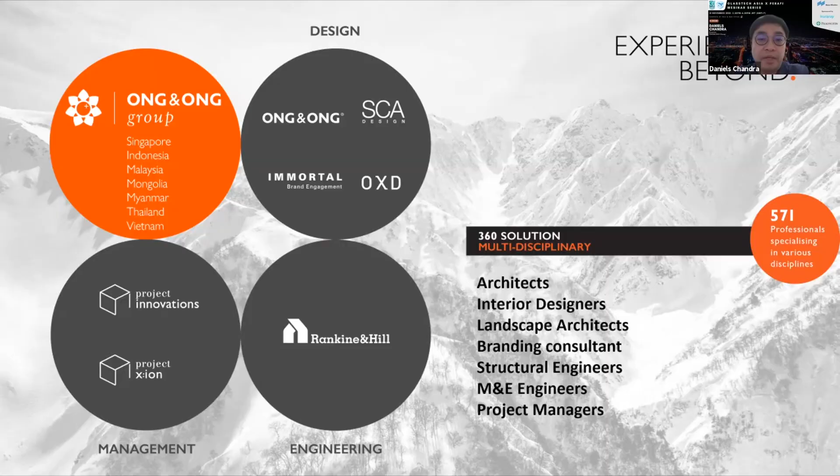I hope most of you are familiar with building information modeling before. In the Singapore context, for example, we started back in 2010 with BIM. The Singapore government basically pushed consultants in particular to embrace BIM in their design, and also for authority submissions and building approvals and so on.

So BIM essentially is basically we model the thing first virtually, and we produce the drawings that come from the model. It's not the other way around, where you create plan, floor sections, elevations, and then get the models after that. You actually start with the model first, and then drawings come later.

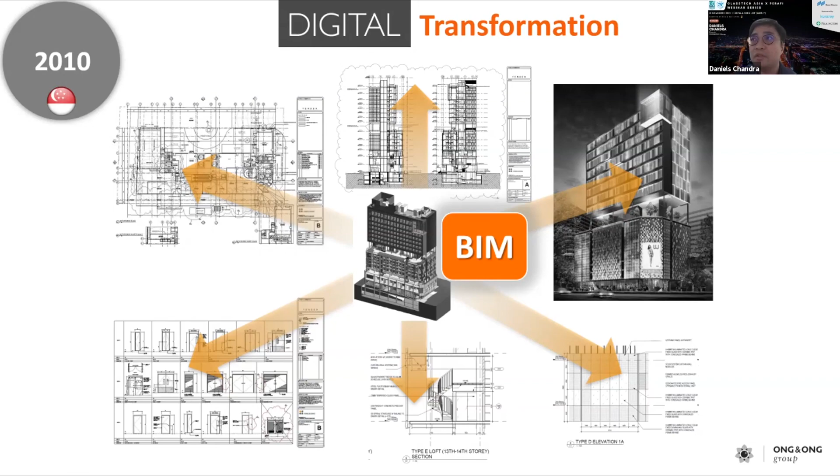The use case of BIM is pretty much across the board from start to finish of the project - starting from design development, conceptual design, including authority submission for the Singapore context, 3D coordinations, and so on, all the way until FM and some automations. This is what we have for BIM.

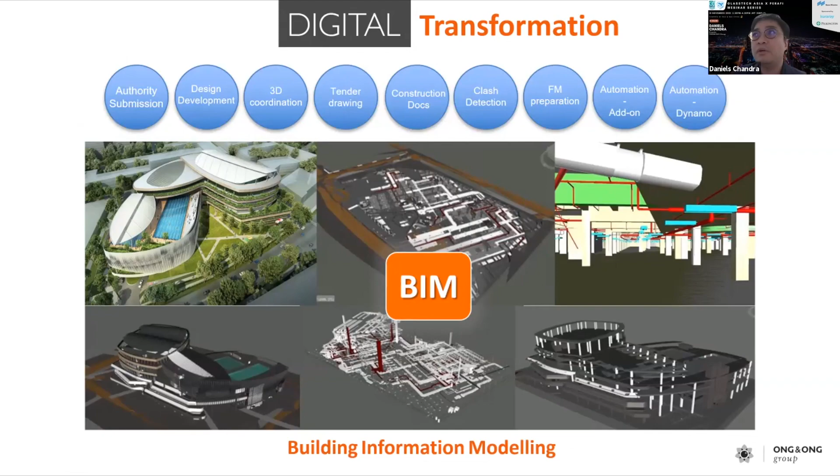Singapore also embraced what we call virtual design and construction, which is VDC. That was back in 2015, which is pretty much another so-called enhanced process after BIM. So we have BIM, we have ICE, which is integrated concurrent engineering, where everybody gets together to do coordination using the BIM model.

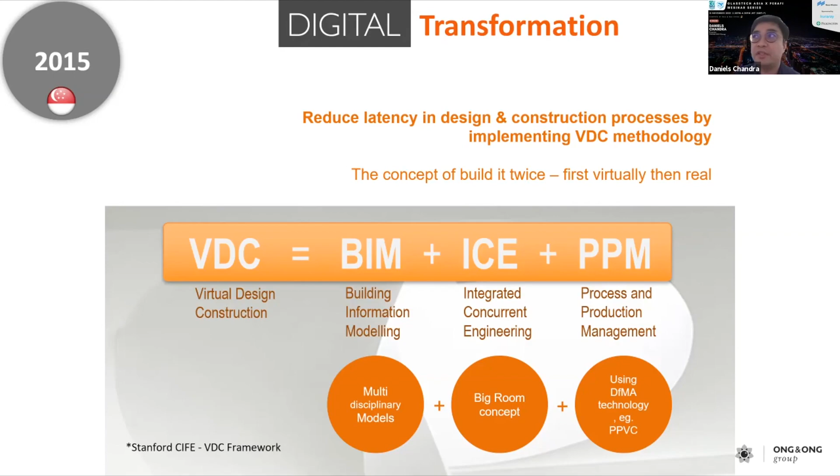And then some processes of production and management, things such as DFMA, for example, design for manufacturing and assembly. All of these are part and parcel to create a virtual mock-up of the actual thing before it's actually built. So what we call is, we build it twice - conceptually we build it in the computer first, then after that you build it on site.

Just to give you an idea, this is one of our projects using the VDC process, where we built the whole entire thing virtually from design all the way to the construction process as well. Meaning, for example, site logistics, how these things are actually constructed, from the building structure, architecture, M&E, as well as the facade.

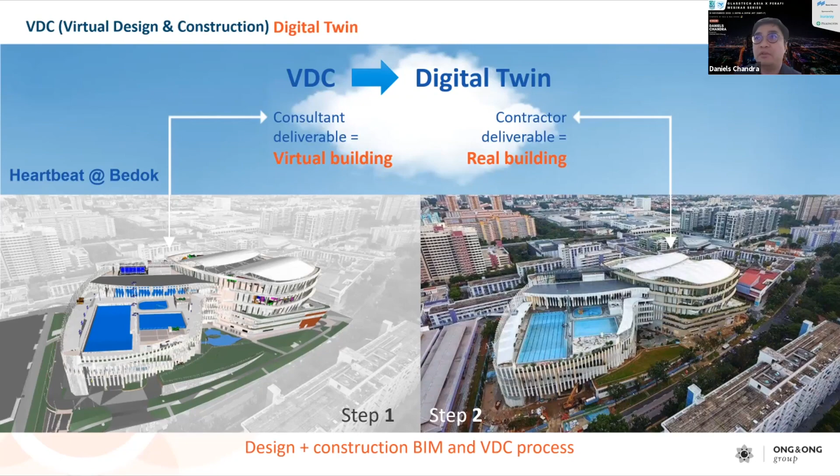So step one is build the thing virtually using BIM technology, and then second is to actually build the thing on site. So make sure everything has no issues, no clashes, no problems, then you actually construct it on site. That's the holistic approach of VDC, which is pretty much the approach of digital twin, where you have the physical and the virtual together.

Now IDD - this is one of the latest approaches of digitalization from the BCA Singapore. The earlier approach started back in 2017. IDD definition is Integrated Digital Delivery. There are 4 pillars in there. The first one is digital design.

Second is digital fabrication, digital constructions, and also digital asset delivery and management, which is pretty much FM, or what we call facility management.

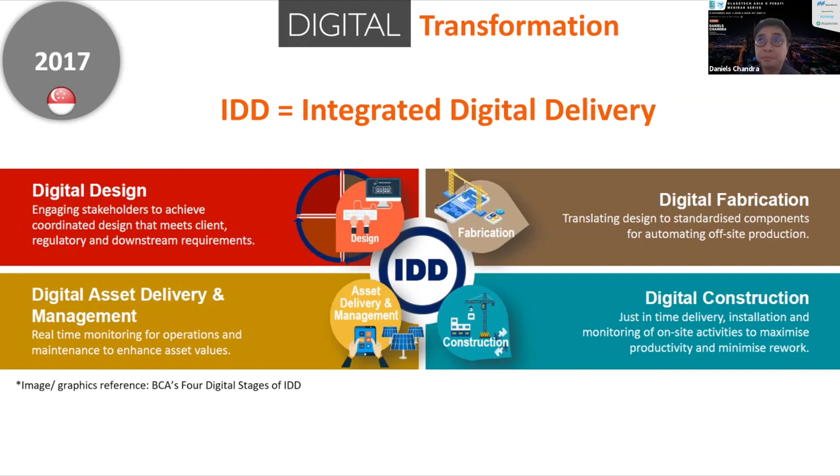For the purpose of today's discussion, IDD is quite a lot of things to discuss if you go through everything. So for today, especially the part that relates to the facade models and processes and workflows to create the facade design, it's pretty much the digital design, which is on the left-hand side here.

It's about how we optimize the design for the facade, how to do some simulations and analysis on the building itself, and how to integrate the whole process together with BIM and VDC. I'm going to touch base also about the cloud, because especially nowadays with the needs of collaboration, how we actually move from traditional method to digital method. Cloud-based is very essential, especially with the implementation of common data environment. So I'm going to share a bit of that, as well as the base infrastructure to set up the whole entire workflow.

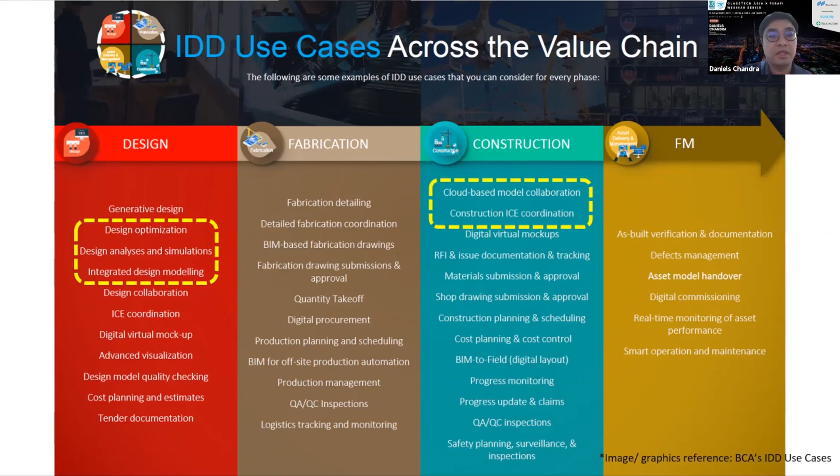In ONG&ONG context, for our digital transformation pillar, we came up with a strategy we call digital beyond. It's basically a three-prong approach: first is the digital workplace, second is digital workforce, and last is the digital workflow. So we set up our digital workplace as a base to enable the other two.

Our staff and manpower need to be trained and need to change their mindset to embrace the holistics of digital transformation. And of course, after that, the workflow itself needs to embrace the whole three-prong approach again, and deliver it in a digital way rather than doing it the manual way.

Okay, so I'm going to start with the digital workplace, the difference between standalone and collaborative. We're moving away from standalone to collaborative. When we started BIM in 2010, 2011, and 2012 back then, it was kind of standalone, in the sense that we were doing our own architecture models, consultants doing their own structure models, and our M&E design partners also doing it on their own.

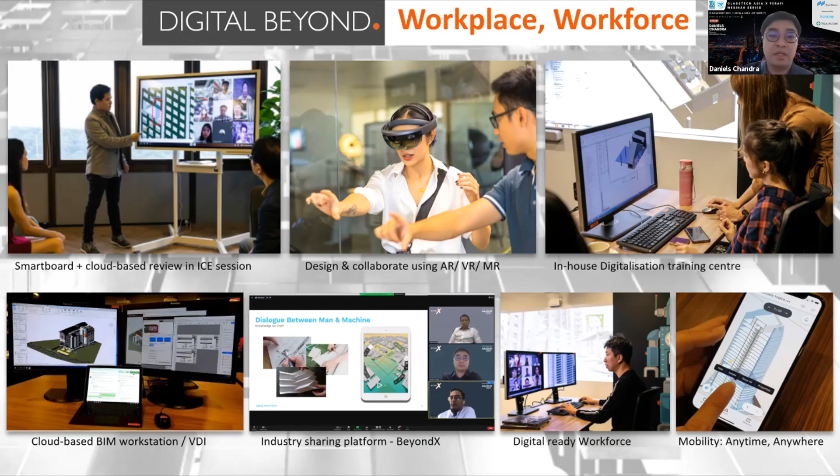Okay, now going back to IDD, which is basically about digital delivery. Digital delivery, when you talk about digital here, is about the data. So why is digital workplace important for IDD? Because we need to make sure the data is entered correctly and then collaboratively and correctly implemented in the system.

So therefore the project can be delivered without any issues and any dramas, pretty much. Right, so we embrace what we call CDE, Common Data Environment Platform, to support the IDD framework.

That is to ensure everyone's actually working from the same data source. It's not like one consultant having their own thing, their own data set, their own floor plans. No, we don't do that. Everyone needs to work in the same digital environment, in the same cloud-based environment, which is the common data environment that we are looking to.

So in ONG&ONG context, this is the setup that we currently use now. We moved away from the server environment because we have 7 offices around the regions, so we move everything to the cloud now. This is what we have now, a common data environment across the offices, and we're also sharing this with our consultant partners, main contractors, and subcontractors as well.

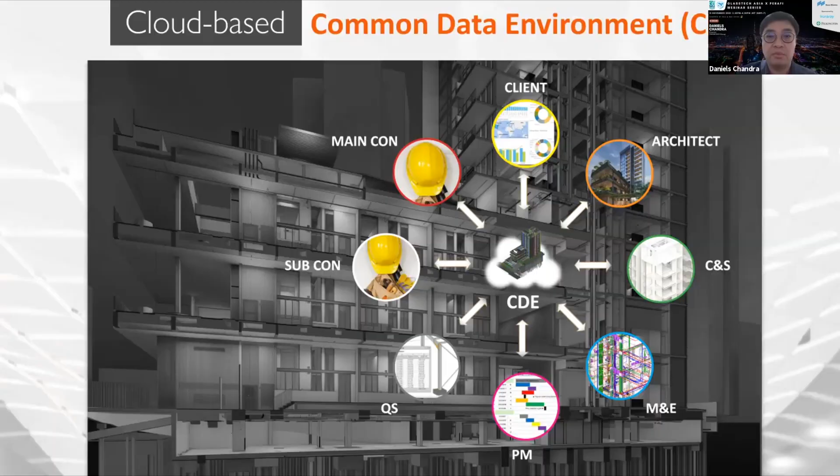So this is an example of projects that we did using the common data environment, and we successfully won an award as well. This is one of the healthcare projects, and another one is a private residential project, which is one of the first IDD projects in Singapore, one of the first 12. So that's one of the examples.

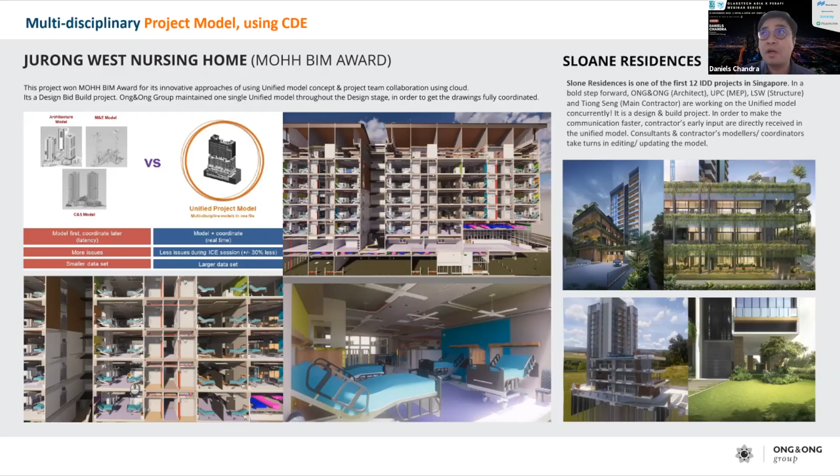Now speaking on the workflow, the reason CDE is actually important is because it's the platform itself. In terms of creating the BIM model and then conducting VDC and integrating it into the IDD workflow, that becomes one of the enablers. So for example, we can enable a multidisciplinary BIM model, where every discipline, every consultant actually works in the same file, same model. Essentially it's one single file. With real-time authoring as well, we need this kind of infrastructure to be enabled first.

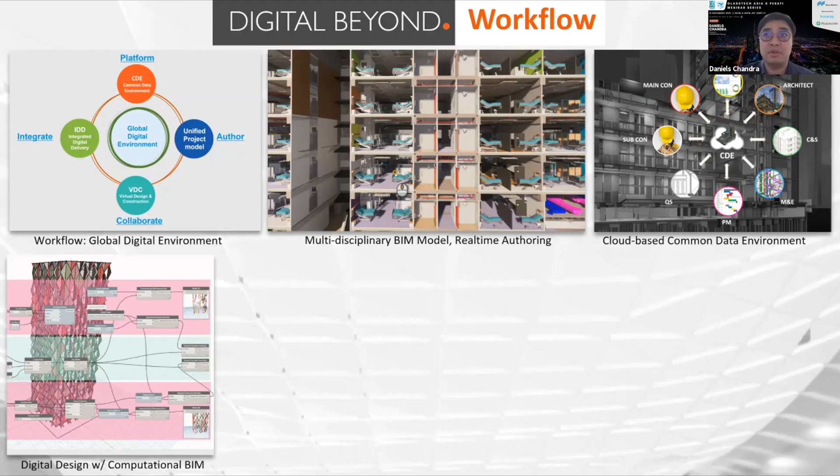Digital design with computational BIM is something I'm going to talk more about after this, which is related to the facade treatments of the building and how to generate some facade options from this tool. This is one of our add-on tools that we developed in-house, BIMomatic, another way to automate the process to ensure that the IDD process of automation is being implemented much better and more efficiently.

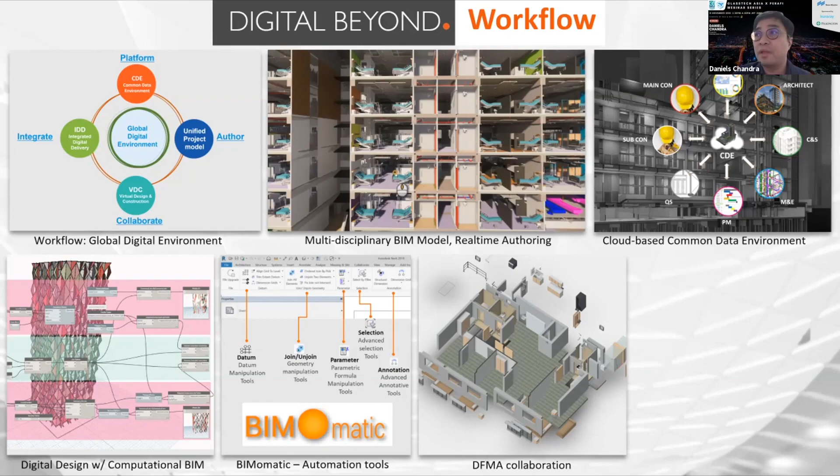DFMA is of course the next level of digital fabrication in IDD, so it's one of the key things we're deploying in the office, as well as for the FM handover. So when the project's finished, we scan the buildings using a LiDAR scanner, then after that hand over the model together with all the sets of the FM data.

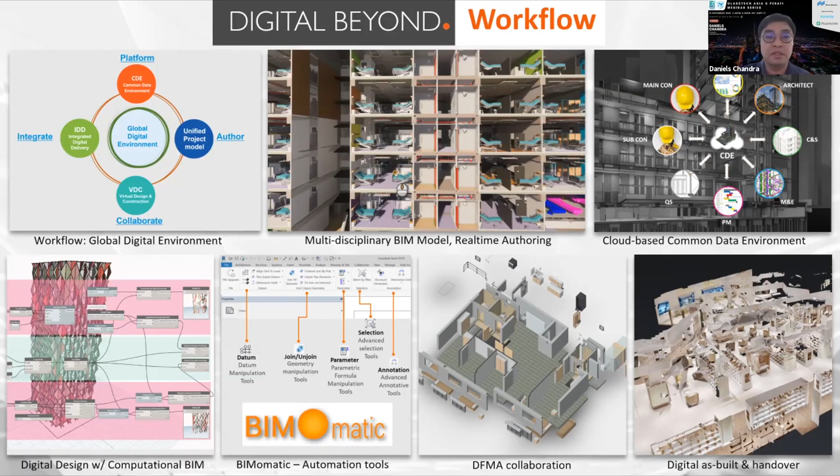Digital design use cases for IDD, I'm going to touch on this. It's pretty much about parametric modeling, computational BIM, and generative design. So just imagine we have this kind of square cube. Parametric modeling, computational BIM, and generative design is one of the methods we normally use to do the facade treatment for the building, which is part of the IDD use case listed in BCA's IDD.

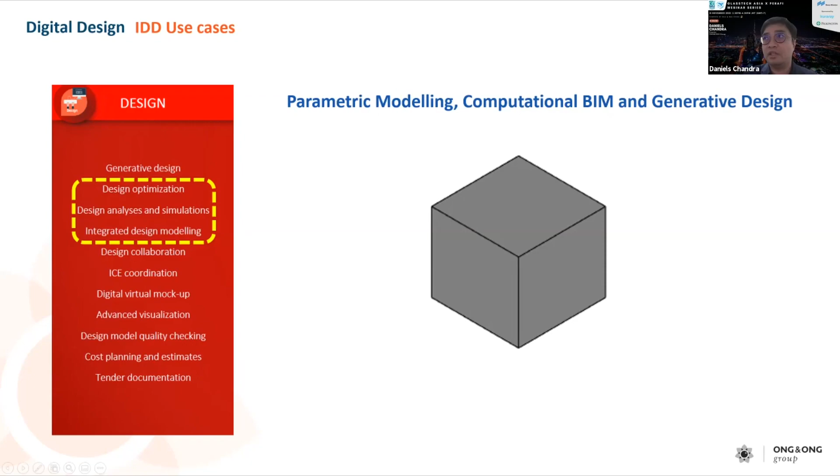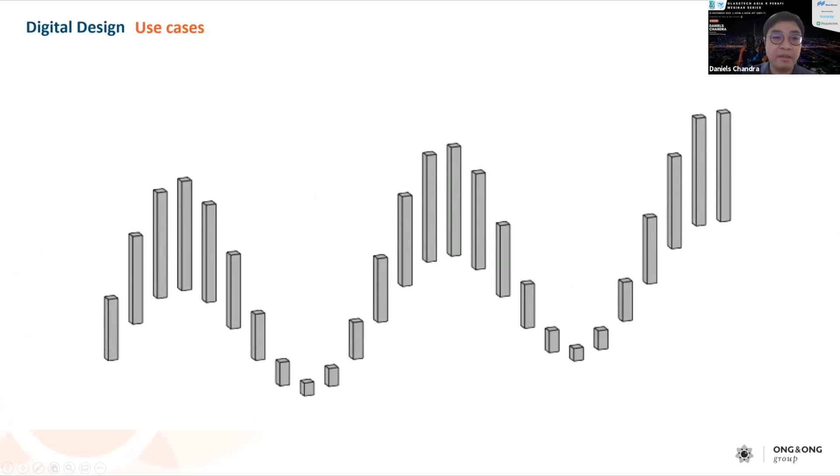Just imagine it's a box like this. What we do is manipulate the box with different heights, different lengths, different configurations of width and height, and then arrange them accordingly with certain patterns. So this is how we actually manipulate the models and do some options for the facade, for the building skin, for example.

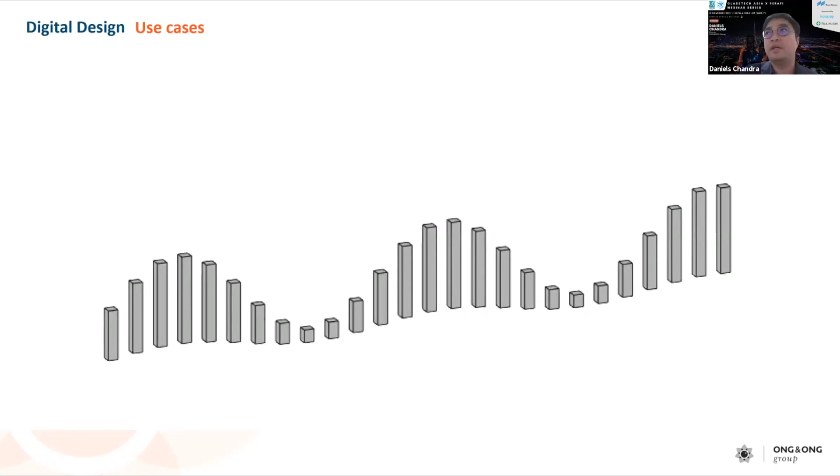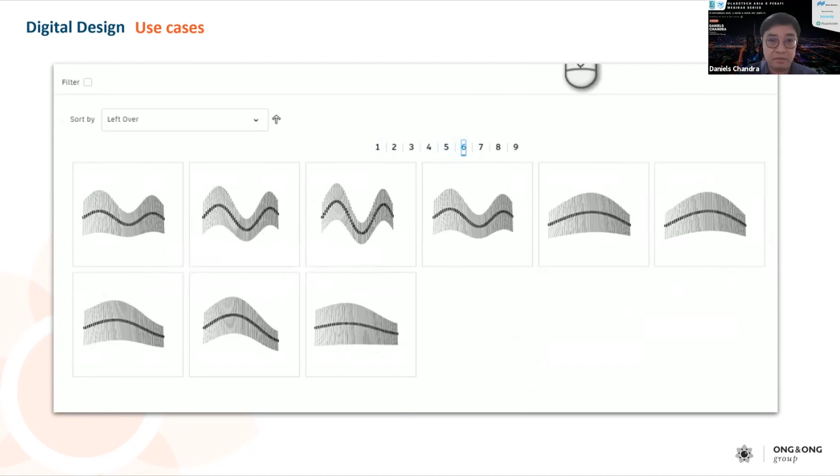Once we manipulate it with a script like this, the computer can also offer us a series of options. These are examples of options being offered, so many pages of options displayed by the computer. As designers or architects, this tool is quite helpful. So essentially, this is the idea of how parametric modeling, generative design, and computational BIM actually work.

Now I'm going to show you some case studies from the projects themselves. This is one example of a master planning project with two towers, I think it's residential. So it's a typical building massing exercise.

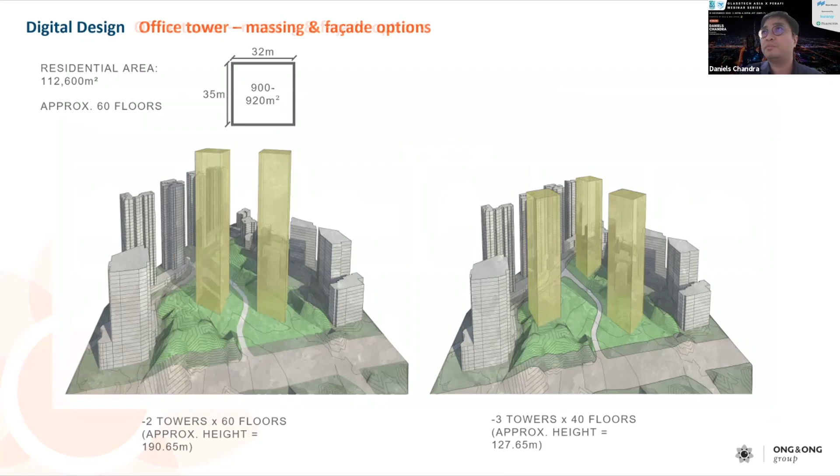So we have typical towers like this, with the setup with the ventilation gap, and also some balconies and terraces and so on. And this is one of the samples of the floor plans. So the floor plan layout 1 and layout 2, there are 2 different things, with the balconies, fenestrations and stuff.

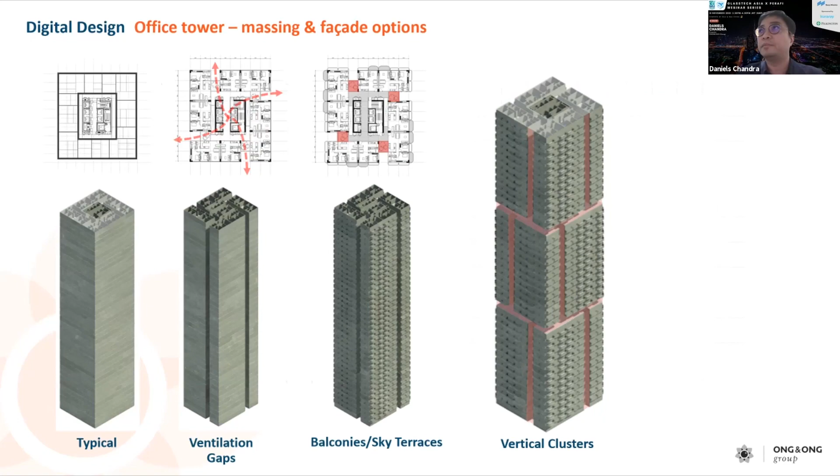Now, after that, we're playing around with the vertical clusters. So how these vertical clusters work: we can set the different permutations of the massing itself using the script. So this is an example of how it works. We're using Dynamo on this. Models are done in BIM using Revit software.

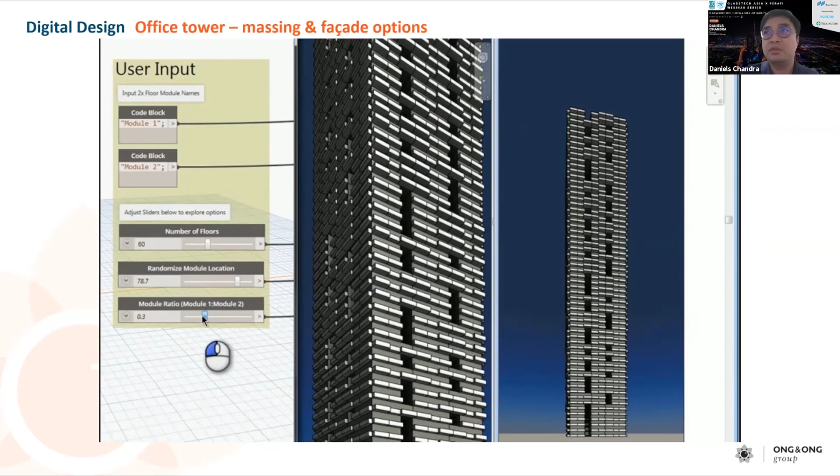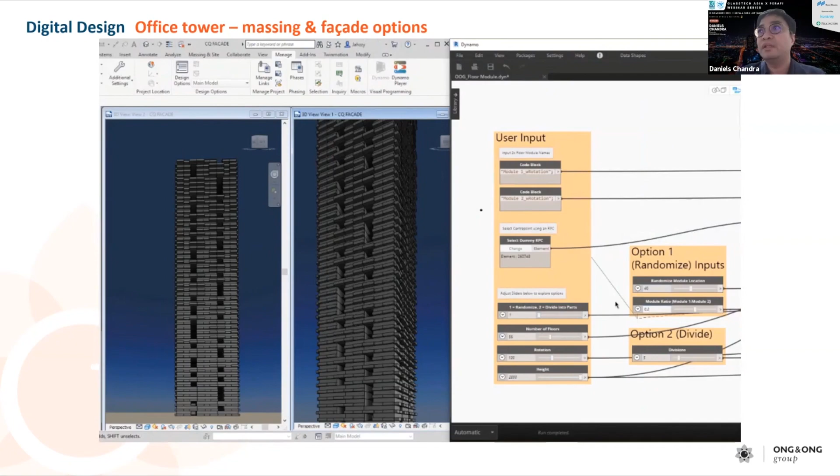So we have these sliders to change the modules of the facade, and a few sliders there to randomize the pattern. So it creates different treatments of the facade itself. That's how it works in terms of getting different feels of the elevations of the buildings using the script.

Another example is this one using generative design, where the computer gives you different sets of design options, and then you can choose which one is suitable for your case. And there's another set of scripts using Dynamo to set the site dimensions, plot ratios, and so on, and then some facade divisions and rotation angles and stuff.

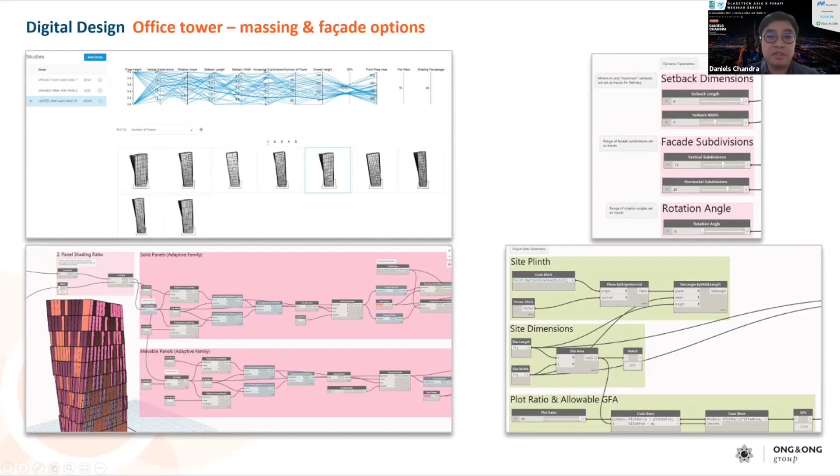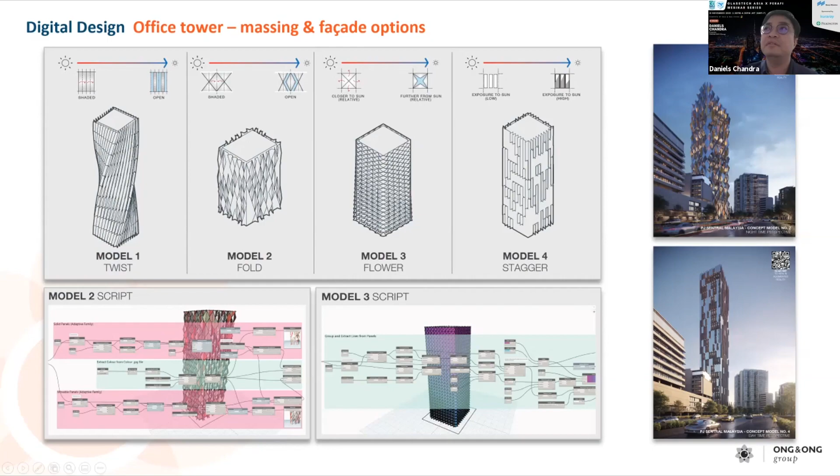This is an example with the paneling options: we twist the massing and use a different size of paneling system. This one is a square one, and the other one is like a diamond shape. And this is some of the outcome of the design with the model twistings and foldings and flowers and staggering, with 2 different sets of scripts.

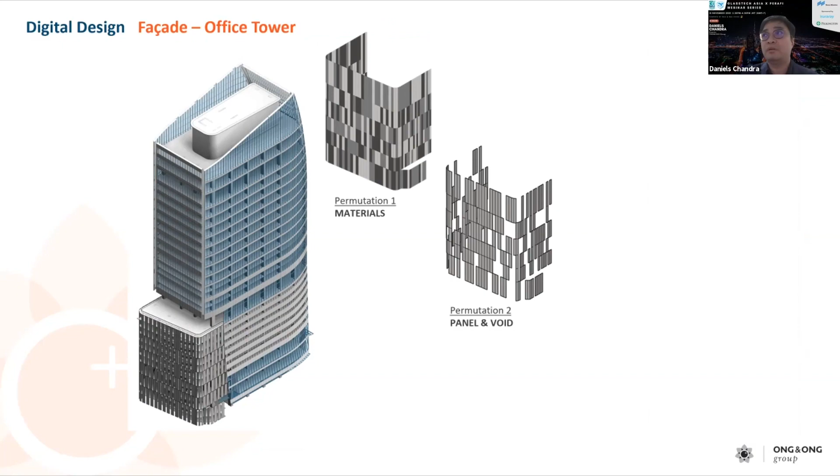Another option is also this one. This is another exercise of permutations of materials, so different sets of building materials and color, and also the panel between solid panels and void panels, and another one with the checker options as well. Again, we're using script to do this. Basically, the input gets the materials, the sizings and so on, then we process it, and after that create the output into the model.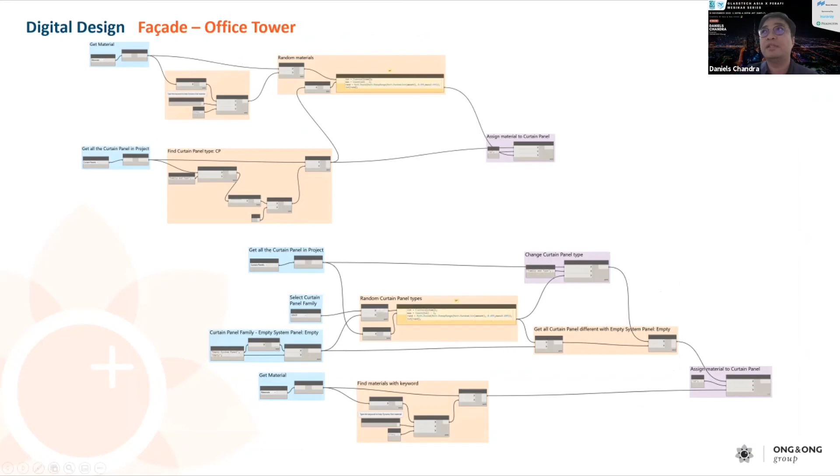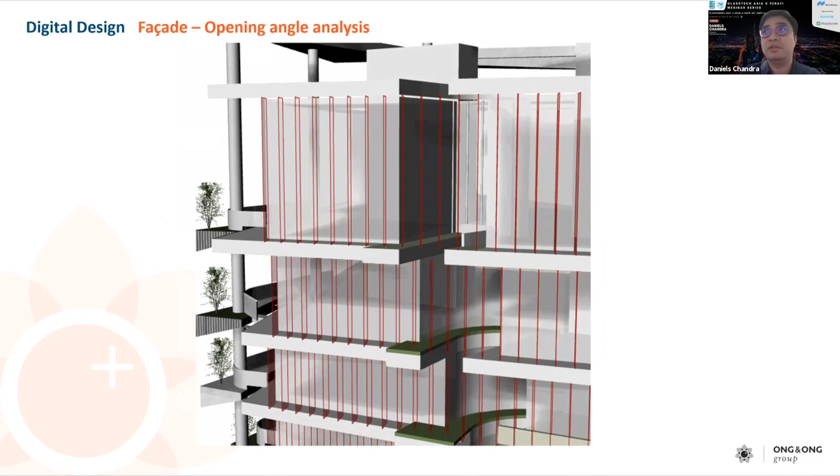This is another one, for analysis. Basically the facade treatment: how the panels correspond to the sun, for example the sun angles and so on. To give you a bit more detail on the idea: how these vertical panelings respond to the sun orientations.

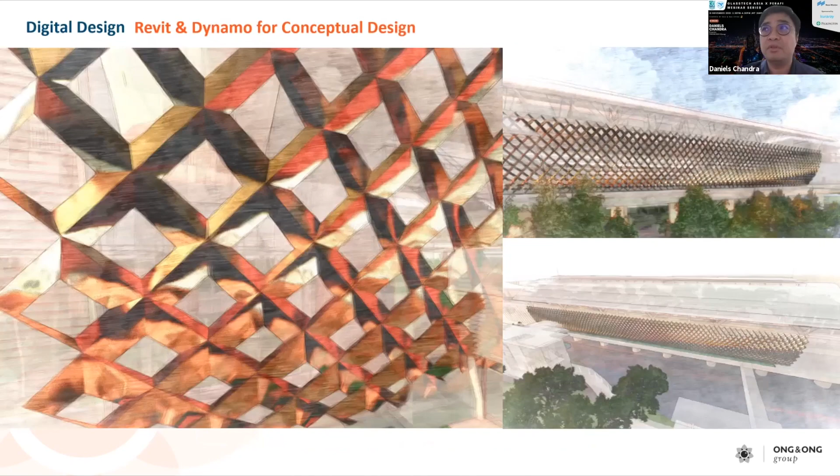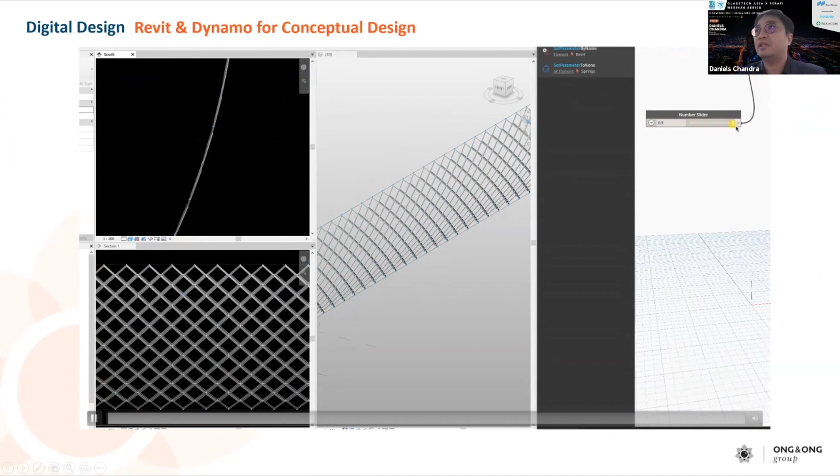Another example is dynamic architecture panels. So how these things create more dynamic shapes, different sets of openings. It starts with simple rectangles with the openings in the middle. And then we join them together using parametric design to array them together. And with the sliders, you can adjust the openings and the closings of the actual panel.

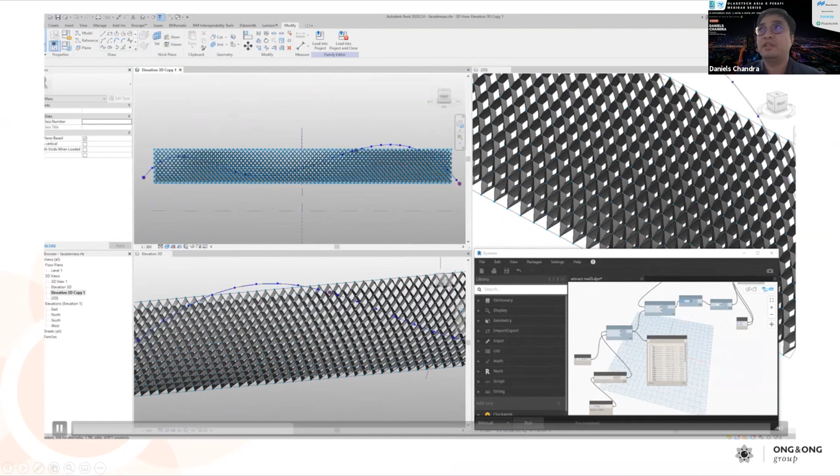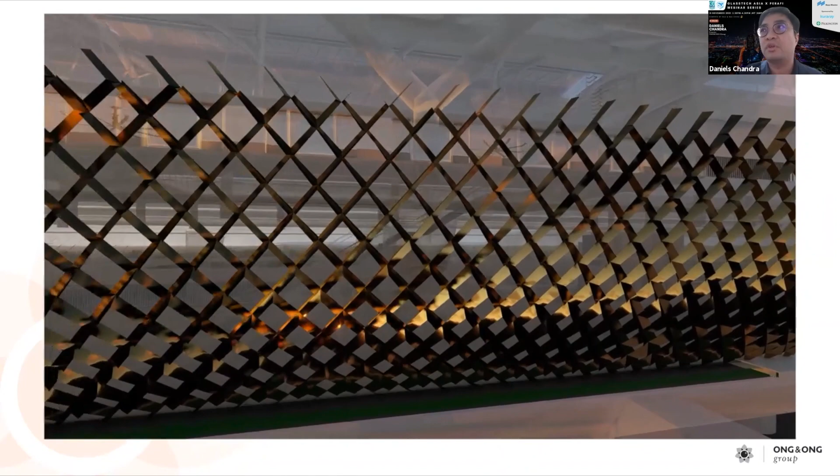So now with this, we can also create different sets of more dynamic, gradient kinds of openings rather than just a flat one. All of these are done by scripting, and visual programming like Dynamo is really helpful for us to generate all of this. And then we can adjust the design graph here to correspond with the openings as well. And this is the final outcome of the facade itself, with that kind of dynamic opening and closing.

I've shown you all those examples. Basically, in our context, we author all of these using a cloud-based environment. So authoring from design, modeling, analysis, and simulation is all done in the cloud, as well as doing the coordination with other consultants. So we use 100% cloud-based. So what is the difference now? This is the traditional way of non-CDE workflow. So we model the facade.

Normally we have to export because you may use different software, right? You may use different applications to export to another format, and then you get it uploaded somewhere because you need to send it to another consultant. Say for example, the facade consultant wants to send it to the architect consultant, right? You need to upload it, and then perhaps you use a third-party cloud solution or third-party FTP server. You have to actually temporarily store it somewhere, right?

And then the other party, the architects, actually download them. And then after that they have to import the models and then do coordination and integrate. Now imagine if this needs to be repeated over and over because the design keeps changing, for example every 2 days or every week, right? So the process is quite tedious.

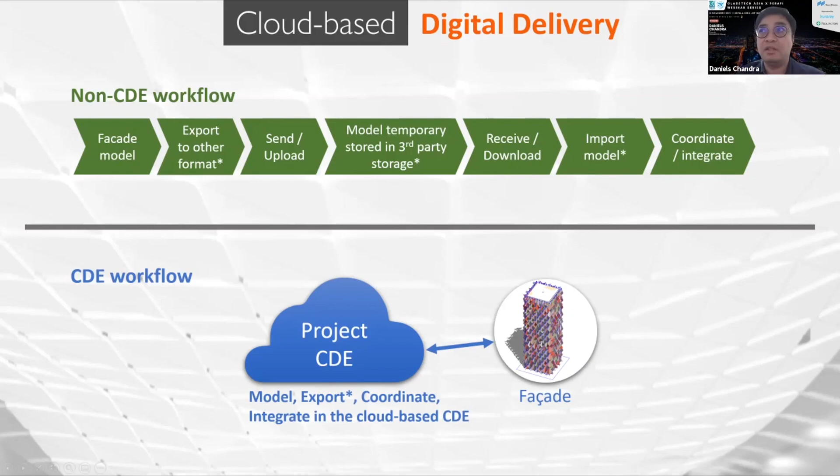So in our context, we set up what we call a CDE workflow. So everybody actually works in a CDE environment. So we model, export, coordinate, and integrate in the cloud-based CDE. Everything's in one place. So facade is actually one of them, okay? The facade consultant is doing it here as well. Architects are doing it here, as well as M&E and structure. So all the models actually sit in the same common data environment, which is in the cloud.

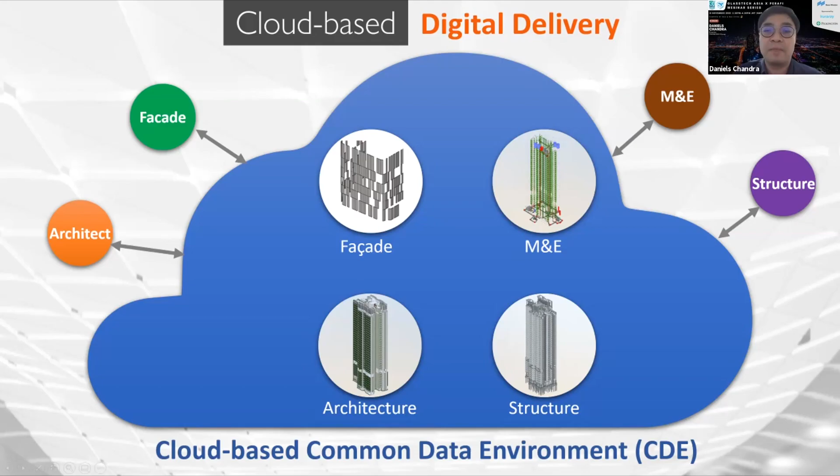What's the difference? The difference is between sending and uploading. With the non-CDE workflow we have disconnection. We hand over the model rather than sharing it. So we're working in silos. I think that's the most challenging thing. With cloud-based, we maintain everything in a single source. We invite them to collaborate, right? So we don't hand over the model. We actually get the team to join the cloud space, join the virtual space, right?

And then, of course, all stakeholders, all the project team normally have to start from the start. So everybody actually gets the correct setup from the beginning, all right? So what we do is basically we just share the files to that person, and then they can just jump in and work on the models in there.

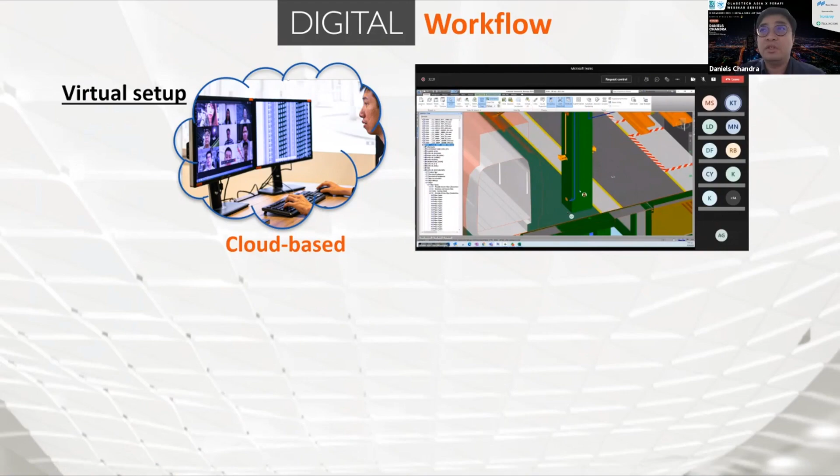Right. So digital workflow, we're going to see more of this happening in the next few years, or even now; many companies are already embracing this. Virtual setups, I think, are the way to go. We always use Zoom or MS Teams, for example, for conferencing and so on, right? So the integrated model is the key. Individual models become an issue now. If you only have your own model, not integrated in one space, it can cause issues in coordination, right?

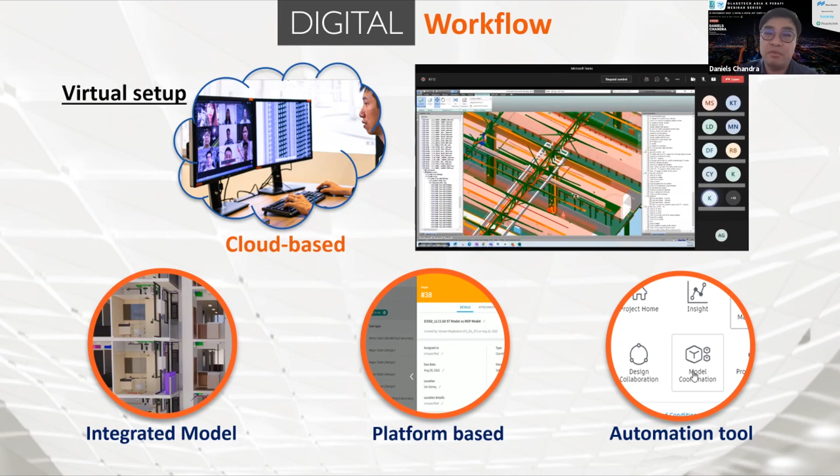So more people are embracing platform-based CDE now to set up their infrastructure, and also using automation tools. Automation can be like simple scripts with Dynamo, visual programming, or maybe some other tools that you may have, right? So with the integrated model, your BIM becomes multidisciplinary BIM rather than a single standalone BIM. It helps on VDC if you have a platform, and automation tools like visual programming help on your automation for IDD delivery.

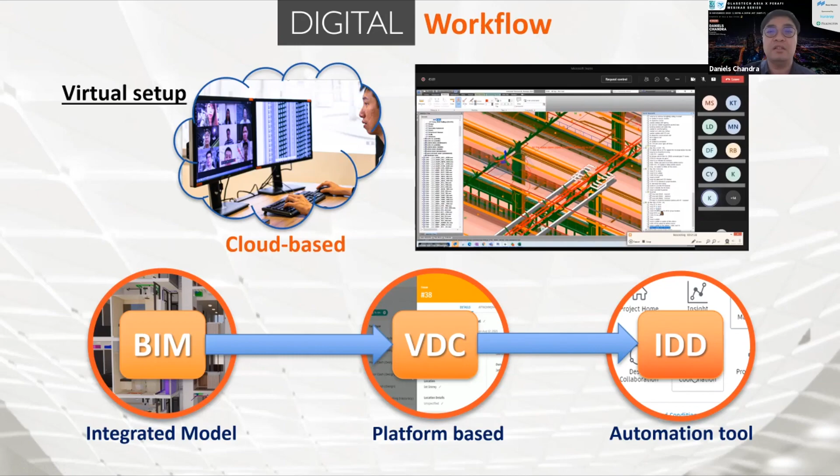Right, so for ONG&ONG, just a quick recap, we embrace workplace, workforce, and workflow as one holistic digital-centric initiative, basically to prepare us to become a future-ready practice, right? So we embrace the whole cloud and working anywhere with mobility and so on. Our latest award that we received from BCA for IDD, we got platinum 2 months ago, and we are also accredited for ISO 19650. This is the international BIM standard, and we are one of the pioneers in Asia to get this certification, and one of the latest digital maturity roadmap scorings from IMDA.

And then some media coverage in Business Times, as well as the Autodesk customer success stories, again for the cloud implementation and ISO 19650.